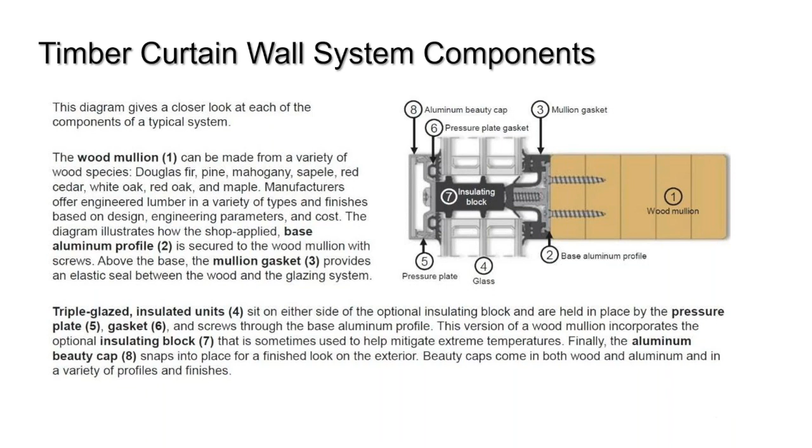A bit more information about the drainage. I told you about the different levels of drainage. As you can see, there are different levels in the wraparound gasket, and they are cut precisely to be overlapping one another. So if water would penetrate the system, it will be directed towards the vertical mullion with a pressure equalized system, much like a very sophisticated skylight system.

So we have three drainage levels, because sometimes we have different components inside the curtain wall, like transoms and complicated angles. This system, keep in mind, the overlapping of the gasket makes it so advanced that it doesn't need any liquid sealant to provide weather protection against water infiltration. We simply use a little foam installed underneath the overlapping gasket, and only by pressure do we get weather tightness.

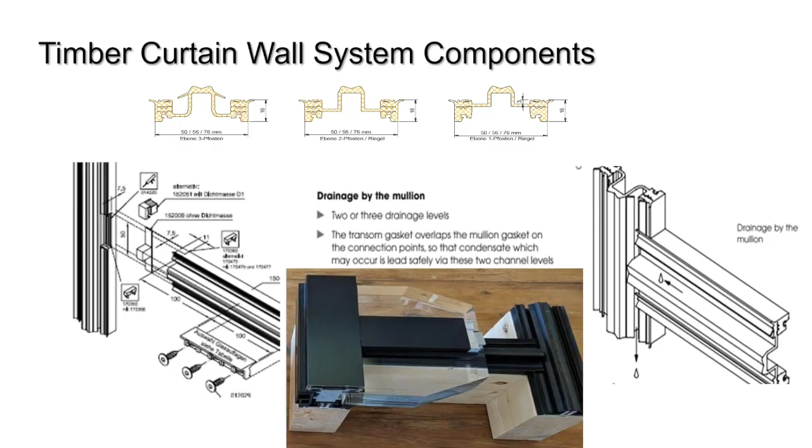So this is an example of the gasket overlapping one another. Just below, you've got the hidden connector. The hidden connector is a very nice feature because you don't see any mechanical connections for the system. The horizontal mullion slides in behind, from inside the building towards the edge, and it's fastened together with screw nails. That's what we call it in our jargon.

Glulam mullions. We use glulam for this system because it's graded as a graded material. We receive the glulam mullions very minimally finished, for a timber frame type of finish. So we take the unfinished glulam mullions, we seal all the imperfections, we sand down this wood piece to a furniture-like finish, and then we apply either stain or directly clear varnish onto the glulam to create the desired look.

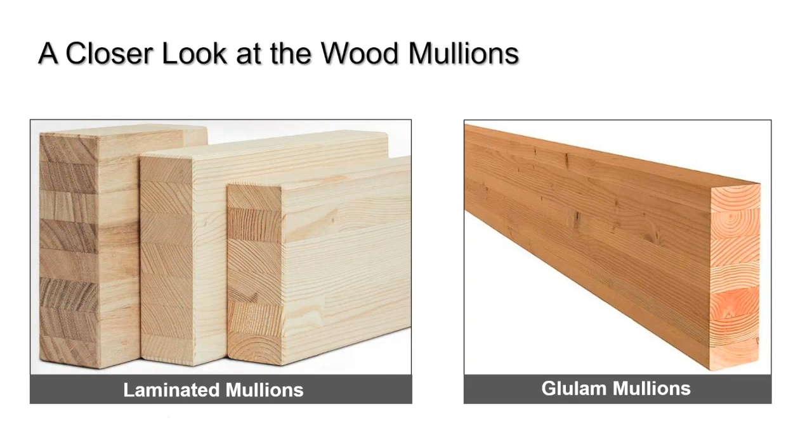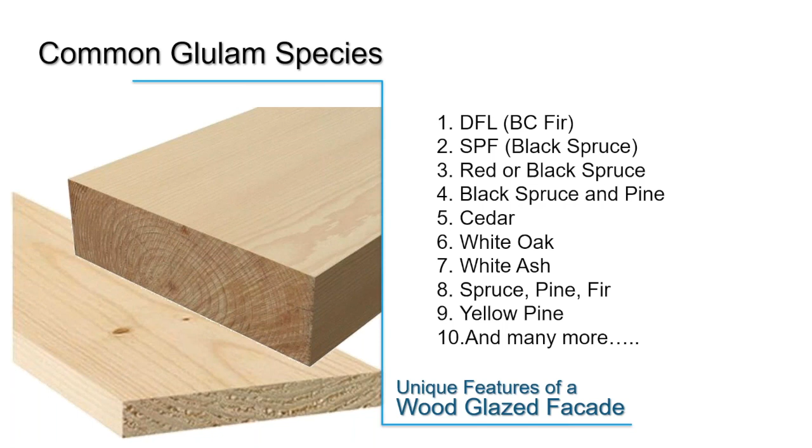We do use different wood species for different design options. In Quebec, there's locally grown black spruce that is used often in our projects. From the West Coast, we have Douglas fir, BC fir. We also work with species that are less knotty, like white oak, white ash, or southern yellow pine, which is available in the U.S.

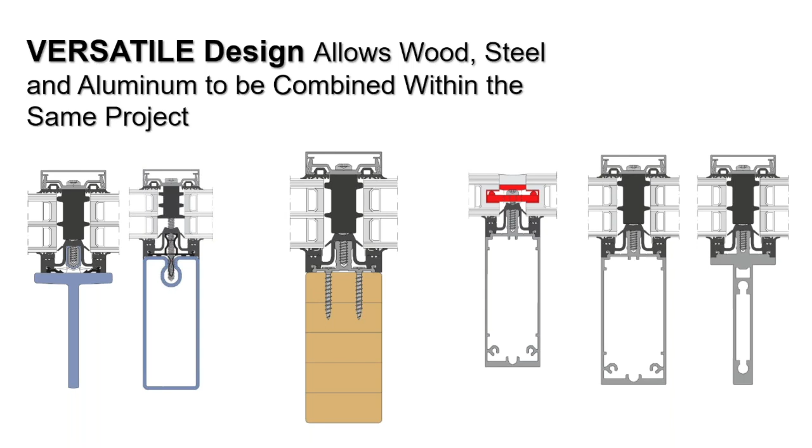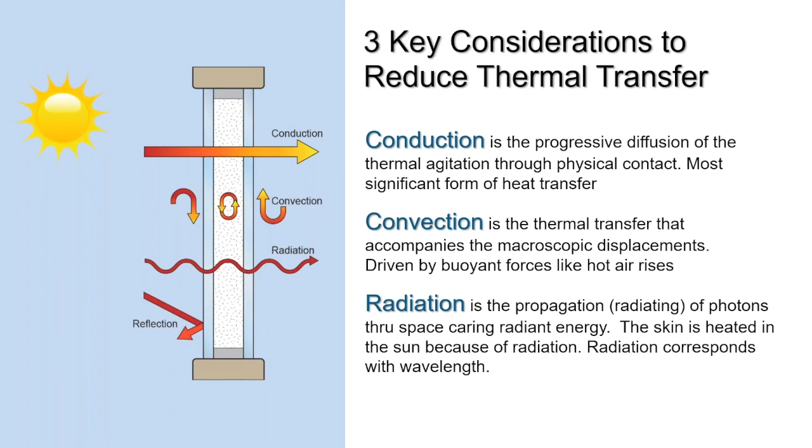So for this system, I'm not going to go too deep into thermal transfer, conduction, convection, and radiation, but without going too deep, this system is up to 72% more energy efficient than a conventional aluminum curtain wall. This is a very ultra high performance curtain wall system. Usually we see manufacturers say series such and such HP. We do not use these numbers, digits, or nomenclature names for our system because it's certified passive house.

The thermal conduction is managed with very high quality weatherproof gasket and isolation foam. Convection in the cavity between the glazing is negligible because we use an isolation foam. And radiation is controlled with an insulating glass unit with warm edge spacer, low emissivity coating, low E coating, and different gas like argon.

Note on the screen that in normal conditions, the isothermal line will be within the glazed spacer area, so condensation or moisture never touches the carpentry. For best results, this system can accommodate up to 64 millimeters. So to reach passive house values, we need 40 millimeter triple glazing.

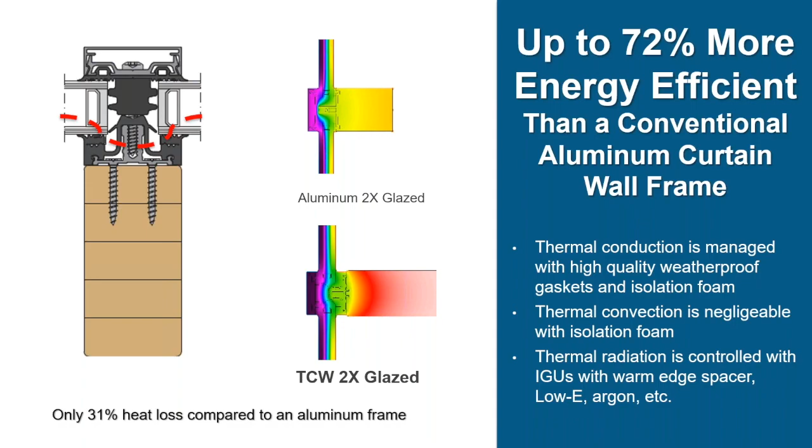Let's talk about structural capabilities. Conventional curtain wall is non-load bearing, but it supports its own weight, auxiliary components, wind loads, and environmental forces. Timber curtain wall, using a back member made out of glulam, can be load bearing. It's a frame material, so it supports all the load of a standard curtain wall, but also the weight of the roof or upper floors.

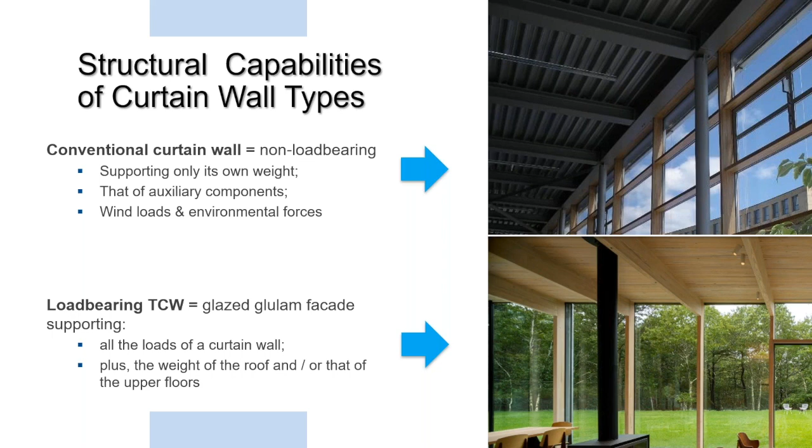Another example of a load-bearing facade, 8 meters high or 30 feet high. So there's no duplication of structure. It's a clean design thanks to the load-bearing mullions. And overall, you've got savings for the total cost of the building envelope. You get better square footage, and also you do not have a structure that sits behind the curtain wall.

The system can accommodate operables such as windows, doors, aluminum doors, wood doors, as long as they can be inserted into the timber curtain wall. In this case, it's a hospitality pavilion in the Canada Park in Quebec, where we have a load-bearing system. These hospitality pavilions have a lot of people coming in and out, so there's high circulation, so we can use heavy-duty doors, normally with curtain wall subframes for the best results. Notice also there's operables inserted in the curtain wall as well, for fresh air.

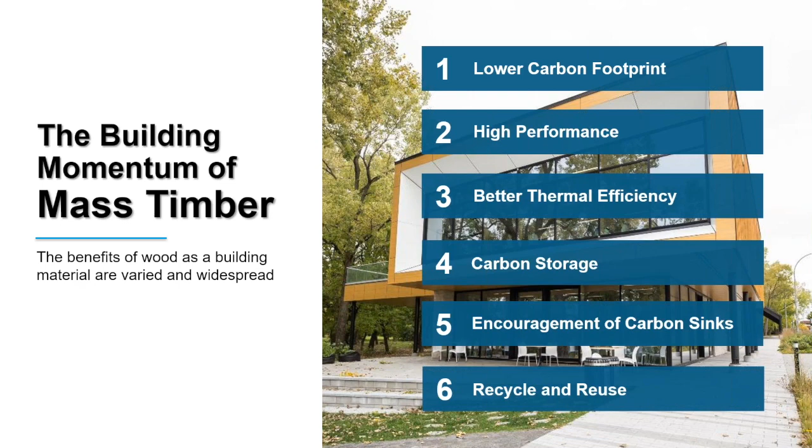Net zero buildings—how this system can contribute. A net zero building has net zero energy consumption, meaning the amount of energy used by the building annually is roughly equal to the amount of renewable energy created on site or nearby. This principle is viewed as a means to reduce carbon emissions and reduce dependence on fossil fuels. Although zero energy buildings remain uncommon, even in developed countries, they are gaining importance and popularity.

We've been involved in a few net zero projects, and we'll see them becoming more and more present.

That's where we sit. Passive house comes from, well, a kind of German standard—a rigorous standard for energy efficiency in a building. Again, it reduces the building's ecological footprint, and it's really ultra-low energy for cooling and heating.

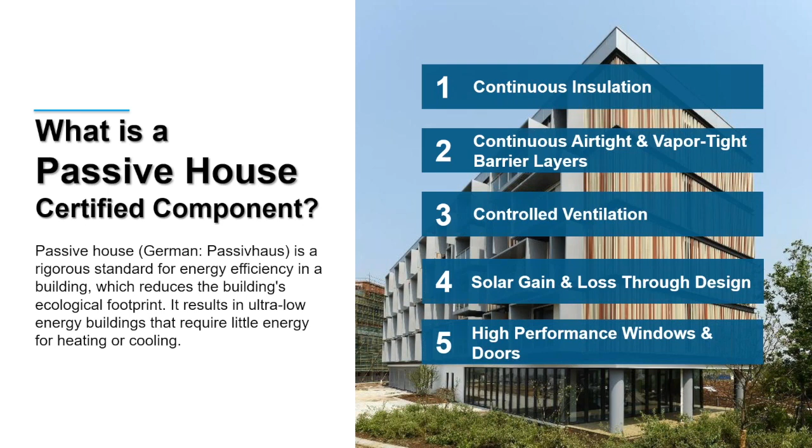A good representation of this principle is how those 5 principles react for a passive house: you've got the orientation—the design orientation of the building—high performance fenestration, superior insulation, superior air tightness and water tightness, and high quality heating and air exchange systems.

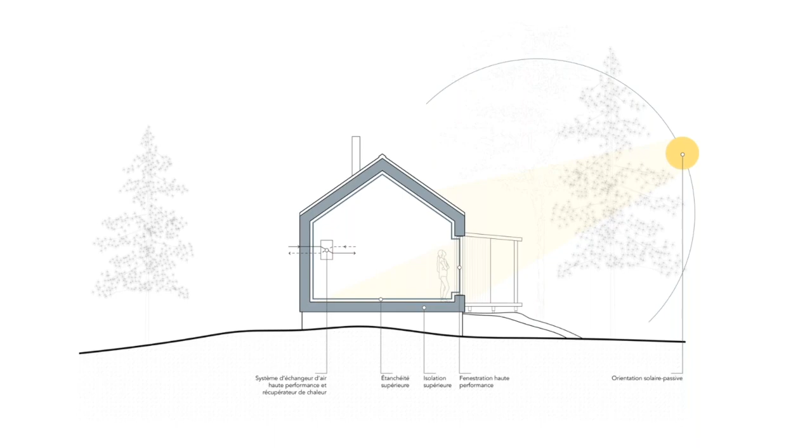But how much does it cost? In our area up north in Canada, an initial investment to get to passive house is about 10 to 15% higher than a conventional house. This is mostly because of the additional planning required at the design stage and realization of construction, and the higher quality of materials needed to get to a passive house building.

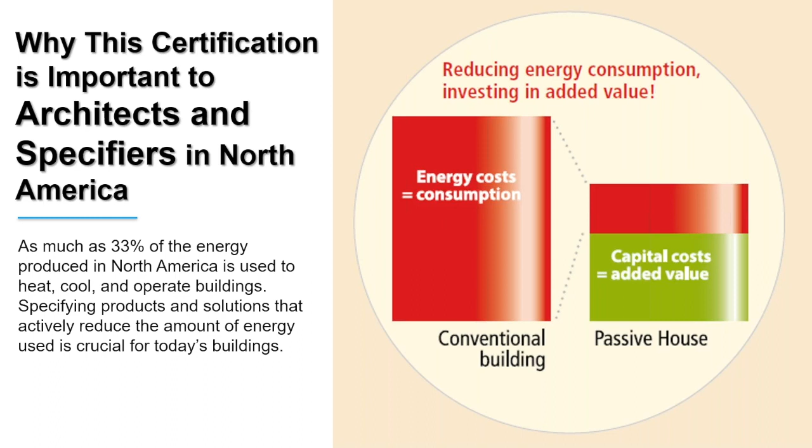Passive house buildings exceed all energy efficiency standards and allow substantial savings on operating cost. Passive house buildings are quite rare, but passive house owners are generally attracted by the exceptional comfort provided by passive construction, by the quality of the indoor air, and by the quality of the construction and materials, which grant superior longevity to the building.

That brings us to our first poll question, Kelly.

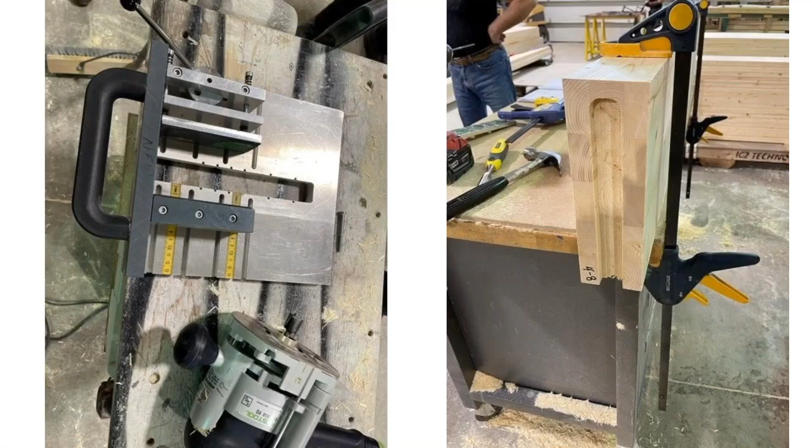It all starts with power tools and custom guides, not unlike any wood shop. As you can see, it's fairly easy to router and install the connectors. Then it's all put together with the base profile, the gasketing, the anchors, the membranes. I'll talk about the membrane system as well.

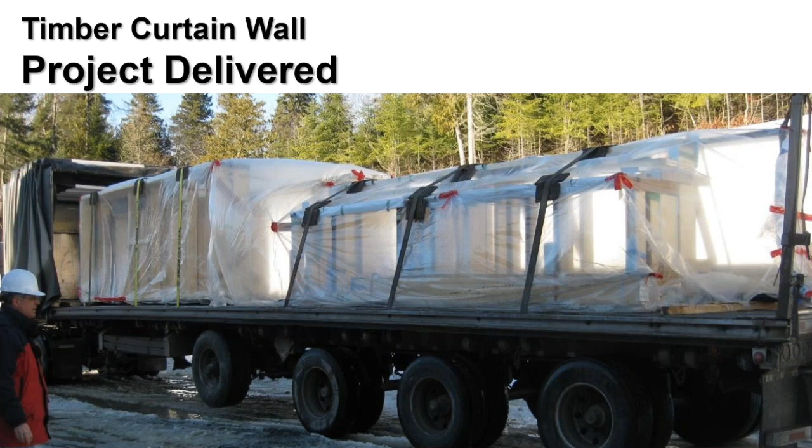We ship the system as modules. Some glaziers in the industry refer to these as ladders because they look like a ladder, with two vertical elements and horizontal mullions being pre-assembled. So we prefabricate the timber curtain wall modules in a factory. The factory is controlled, and it's less costly compared to on-the-job-site installation or fabrication.

Those ladders, it's a stick system, but we prefabricate them into modules. They come with the anchors and the perimeter membranes to make sure they join perfectly with the rest of the building, ensuring insulation and tightness of the system.

The insulating glass units, the IGUs, are installed on site. Everything is factory finished to a furniture level, ensuring factory-controlled conditions for superior quality and overall lower cost and installation time.

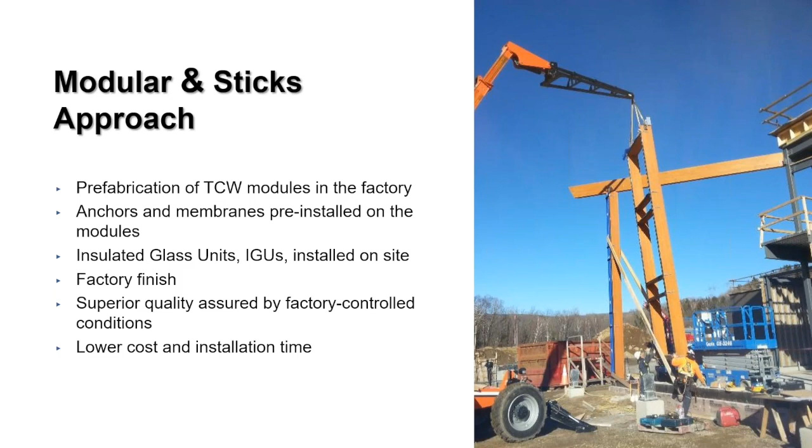In the factory, we can build some very complex modules by prefabricating them. Notice on the far right picture, at the bottom of this module you see the anchor system. As you go further up, you'll see the connectors for the horizontal mullions, and the black area is the gasket.

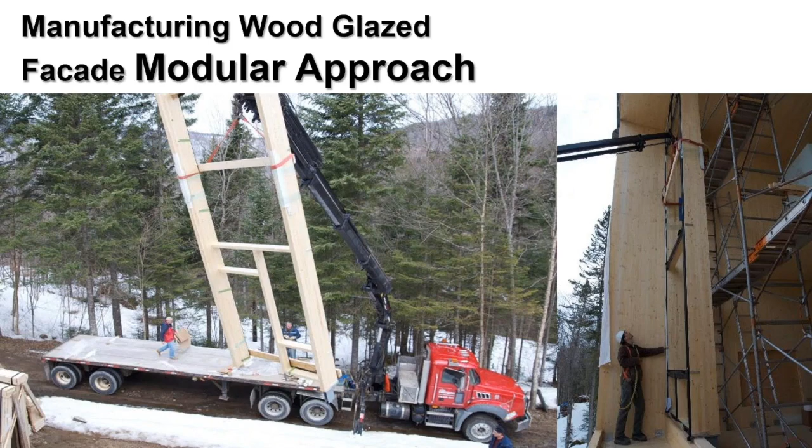If you look at the bottom left of this module, you see the membranes overlapping, but this system will join the rest of the building membrane. Here's another example of complex modules being prefabricated with all the connectors, the anchors, and the membrane being installed in the factory.

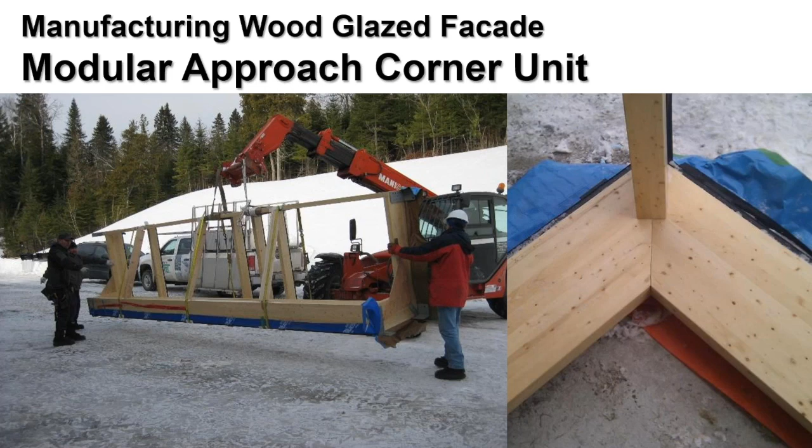This is a load-bearing system, modular installation with glulam building timber frame being installed as one of the last modules of the timber curtain wall is being lowered. Again, everything is pre-assembled except from the glazing and the pressure plates and caps.

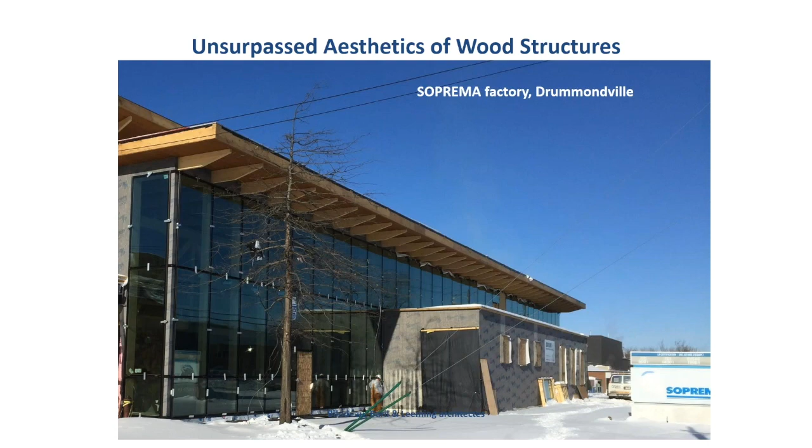I mentioned earlier that this system is a dry system, so we can glaze it in very harsh conditions, such as the picture on the screen. The end result is phenomenal - beautiful timber, load-bearing timber curtain wall system.

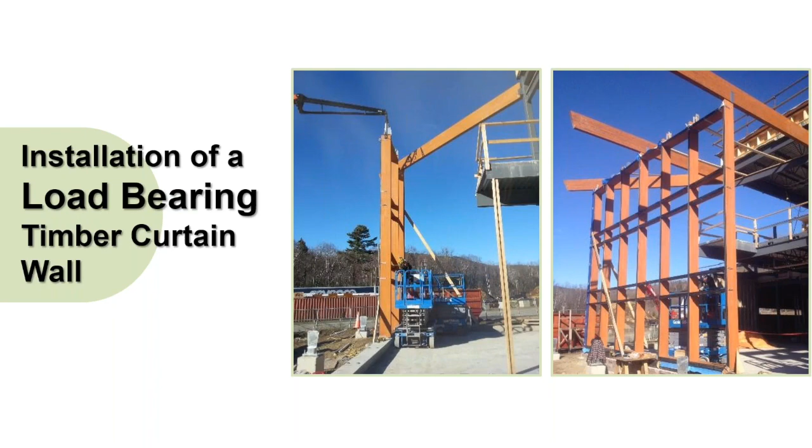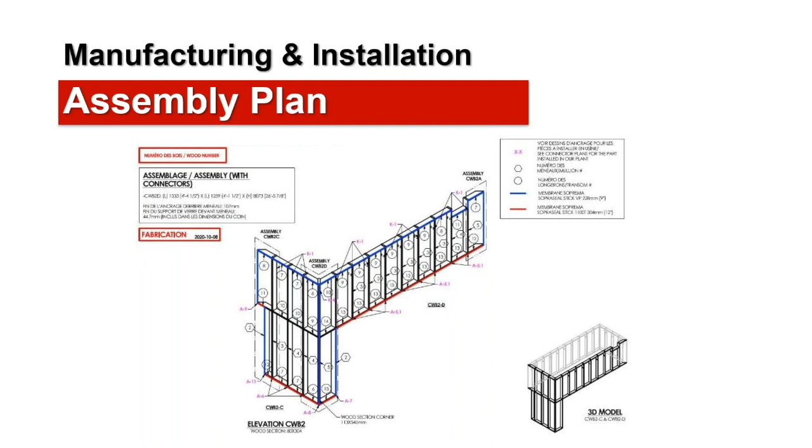Eliminating the structure behind, as you can see, the load-bearing system starts with shop drawings, installation procedures. Everything is well documented. We can install those

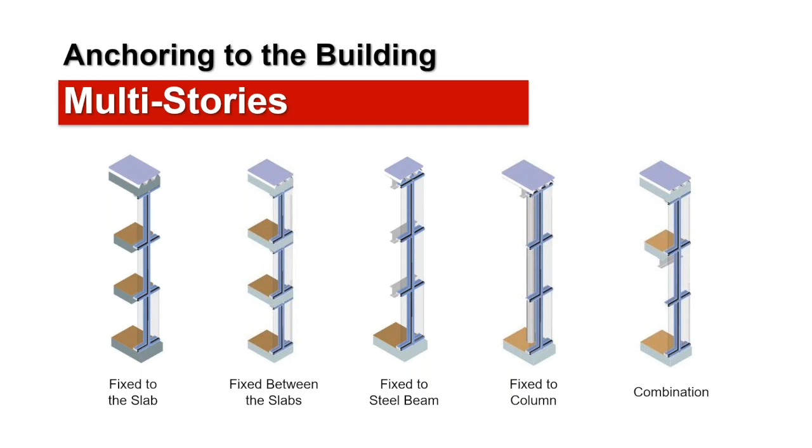timber curtain wall in different ways, fixed to slabs, between slabs, and combination. Our documentation will show the anchoring to the building. As a matter of fact, if you go on our website, you'll see our master drawing documents showing a lot of examples. This is available in CAD, and it's upon request with the Revit family.

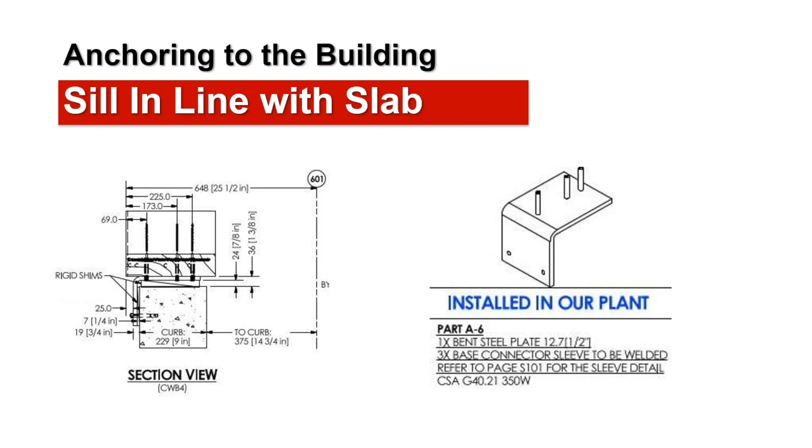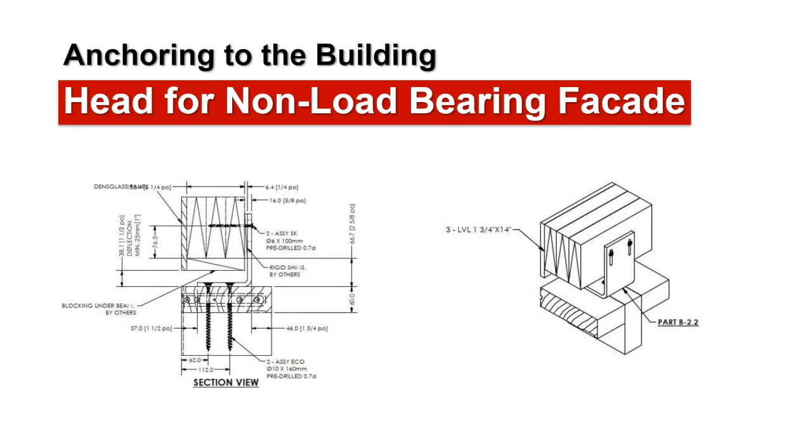Another example of an anchor to the building. This is a non-load bearing facade and the top connections. And where do we excel is with the load bearing system. We love doing those because it really proves the system feasibility and superior quality.

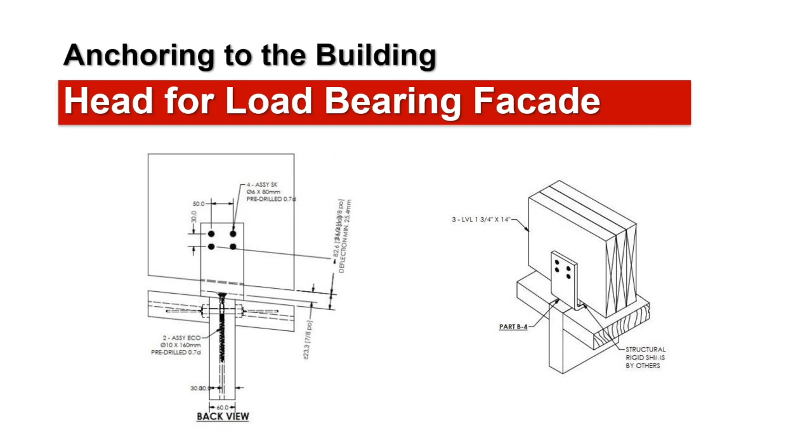Now let's tackle some project highlights. We do have another 10 minutes to go, maybe 7 or 8 minutes to go before questioning.

I'm going to talk about the New York Welcome Center in Wellesley Island, New York. It's a beautiful hospitality pavilion just south of the border in a beautiful Thousand Island area. If you travel from Syracuse to Canada towards, let's say, Kingston, there's a welcome center right there. That's a system that's been installed in 2019, constructed in 2019. It's a 3,000 plus square foot gable curtain wall system.